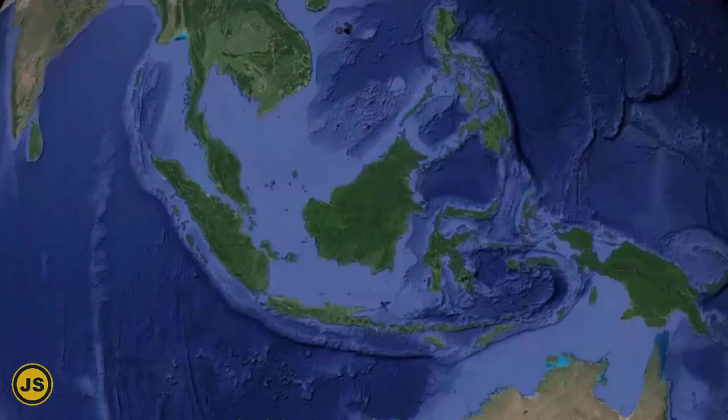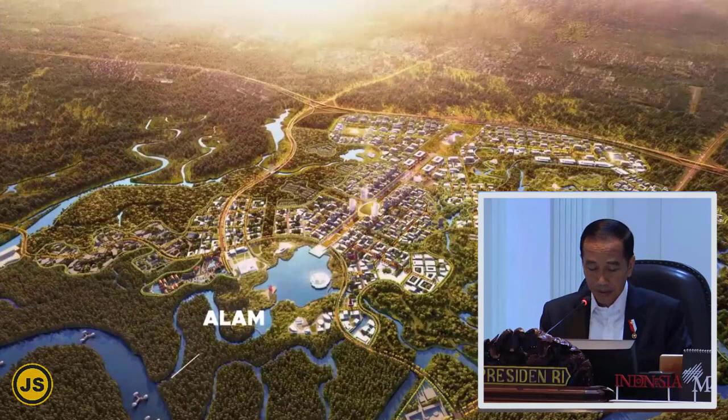Pertama saya ingin mengucapkan selamat terlebih dahulu sudah sampai pada tahapan ini, dan telah terpilih dari 755 peserta Sayembara. Itu merupakan sebuah pencapaian yang sangat hebat, dan sekarang dalam proses penilaian akhir, salah satu dari Bapak Ibu semuanya akan menjadi pemenang.

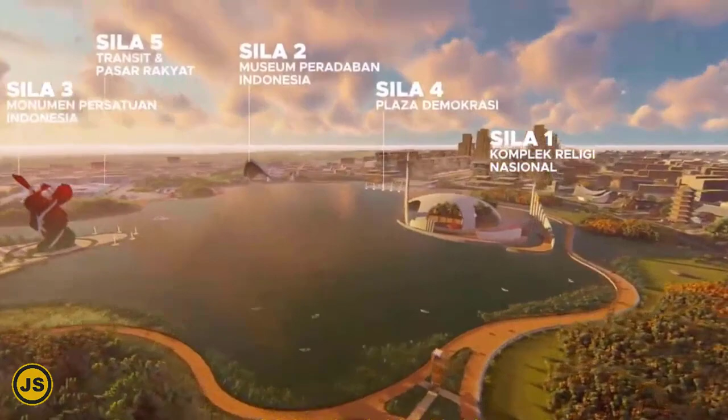Kami membawakan konsep Nagara Rimba Nusa. Jadi konsep perkotaan yang diinspirasi dari kekayaan alam dan Nusantara kita, yaitu hutan dan juga kepulauan. Pemenang terbaik pertama adalah Nagara Rimba Nusa.

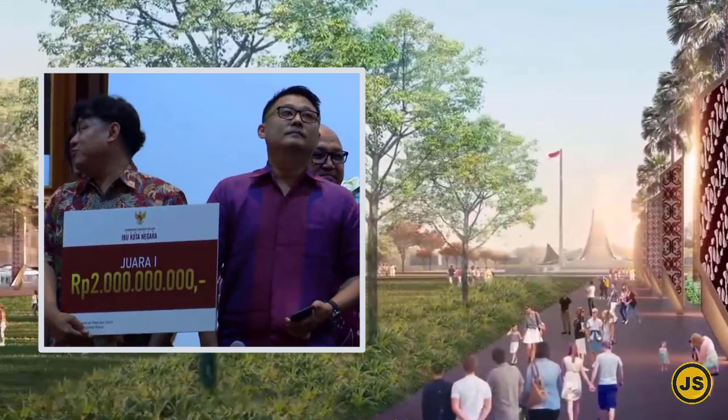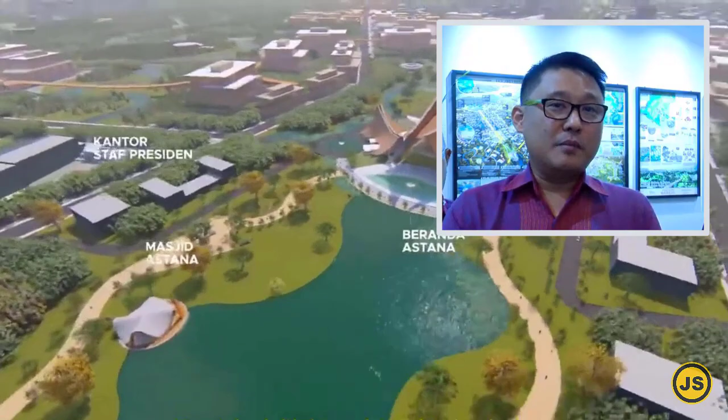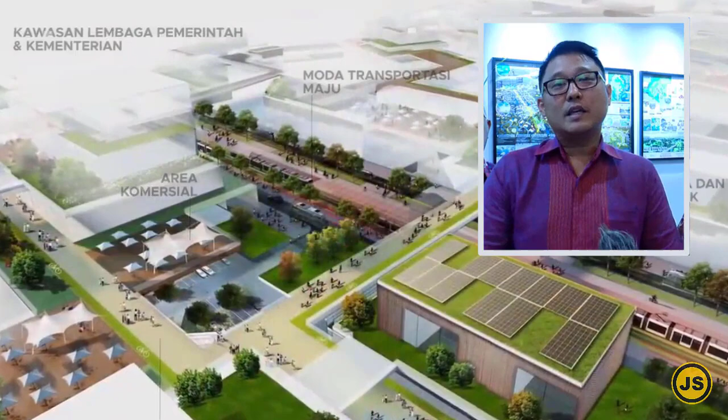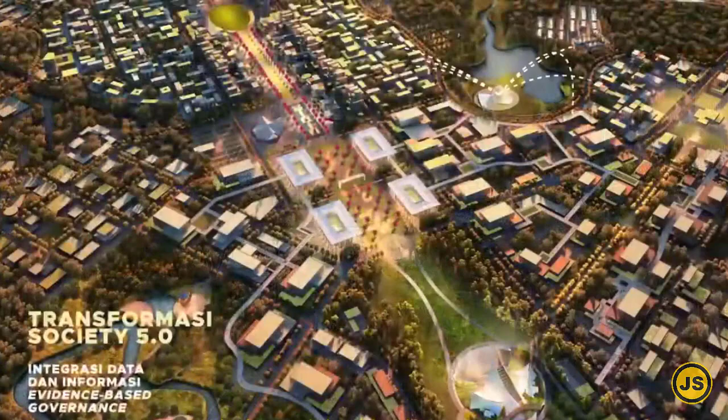Kami memilih konsep Nagara Rimba Nusa karena kami melihat negara sebagai perwakilan pemerintah dan juga rakyat ada di situ. Rimba adalah karakter hutan yang memang ada di lokasi kita di Kalimantan, dan Nusa adalah suatu hal yang identitasnya selalu bisa kita miliki sebagai bangsa Indonesia karena kita tinggal di kepulauan, dan kepulauan itu adalah identitas bangsa kita salah satunya. Dan yang kami usungkan di sini adalah bagaimana kami bisa menjadi kebanggaan untuk bangsa dan juga untuk internasional.

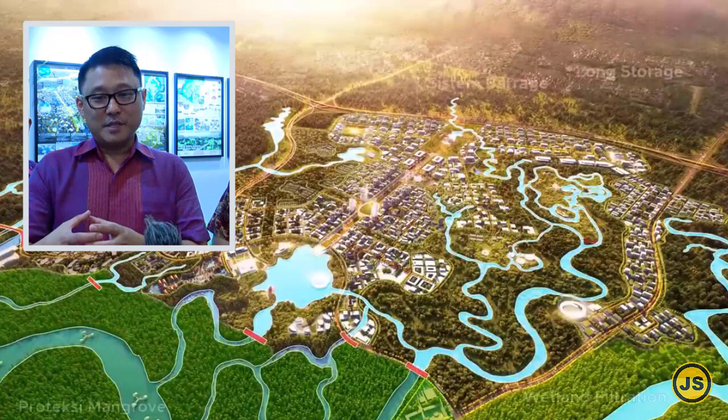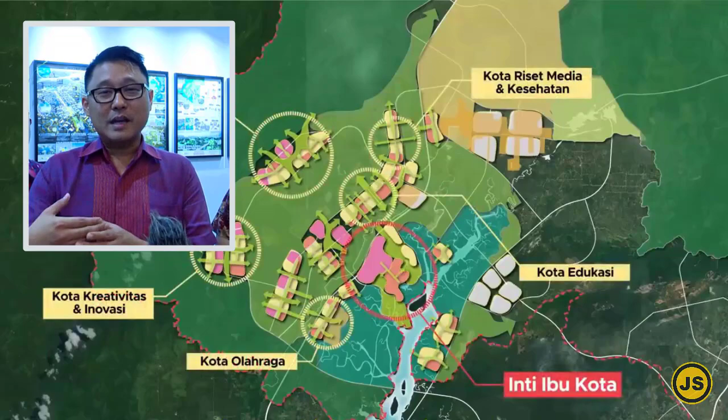Salah satunya adalah bagaimana kita mengangkat cerita hutan menjadi inspirasi kita di dalam membangun. Bagaimana kita belajar kota ini menjadi bagian dari ekosistem alam yang terintegrasi. Dan itu juga menjadi satu langkah awal kita untuk bisa membesarkan lagi hutan-hutan di Kalimantan.

Sebagai komitmen kita, salah satunya adalah kita membuat Heart of Borneo. Heart of Borneo itu 45% daerah Kalimantan itu harusnya hutan. Dan usaha ini dengan kita memindahkan ibu kota di lokasi tersebut, inilah titik untuk salah satu komitmen awal kita untuk bisa melakukan itu.

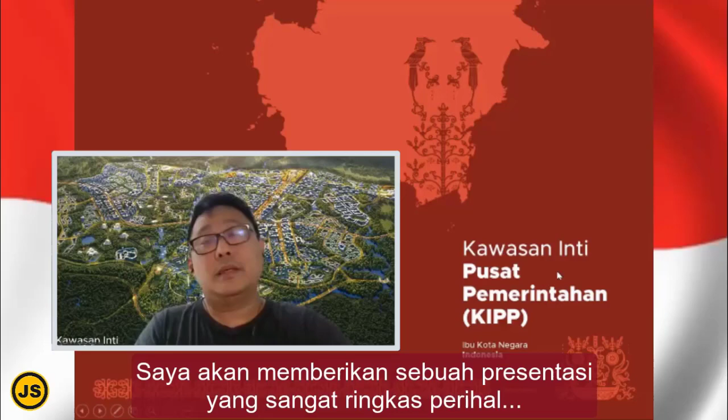I would like to give you a very short presentation about how we transform and also how we translate the vision of the president from the state speech on the 16th of August, just like what Pak Menteri, Pak Basuki already mentioned, that we have the three pillars of building a nation, and also ensuring sustainability and also smart modern city. And I would like to take all your attention to what the translation of that into what we can measure.

When Pak President gave this speech at the Sustainability Week in Abu Dhabi on the 13th of January 2020, he spelled out several key performances of the city, for example the renewable energy, the net zero, bringing also the best technology forward, low carbon city, public transportation, and pedestrian friendly. So we try to translate this into key performances.

As a winner of the capital city design, my profession as an urban designer, we try to bring this to realization into the scale and the blocks that can be discussed with everyone in the forum, especially in the architectural world. So we would like to translate this into the wisdom and the principle of the planning, which I hope can translate to all of the audience here, because I will bring a certain level of visuals.

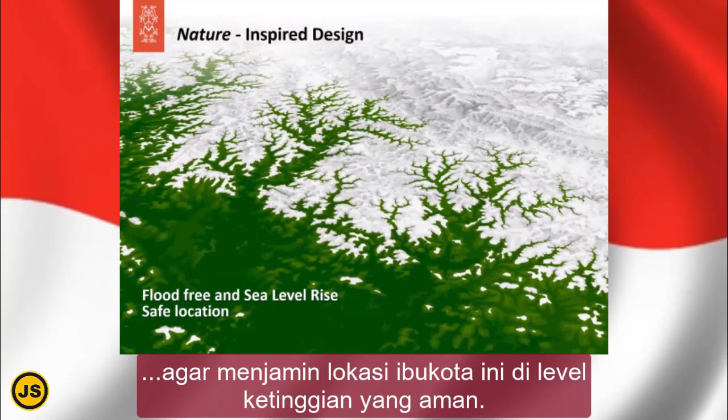And of course, we need road and accessibility frameworks, but this needs to respond to the topography of the local context. We have hill at the back, and we have also mangrove at the bottom. So we are building something in between the hill and the mangrove, the sensitive environment.

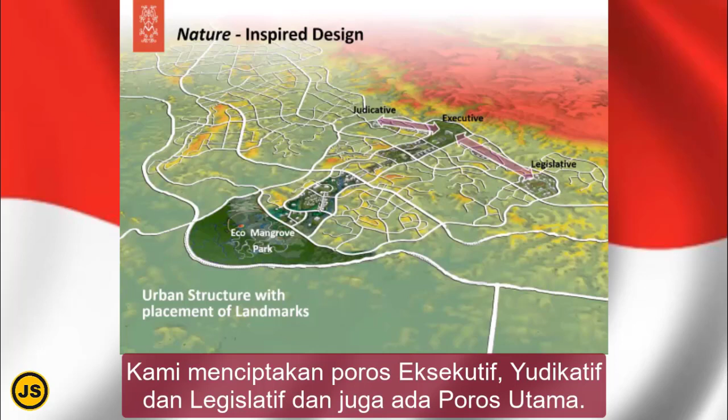So we keep all the main road system connecting between one area to another, but then we also keep the local area connected. And we try to also bring in the urban structures and the placement of the landmarks to create a certain level of axis. We create the axis of the executive, judicative, and legislative, and also the axis towards nature.

And with this, we create also a certain level of urban and green corridor. The urban area and the green corridor sit side by side to create the connectivity between the hill and the wetlands, creating this ecology, water, and animal corridor in the bigger scale.

And we also create what we call the green and blue fingers. This is essential because this will be forming 70% of our development to be green and to be part of the nature that is naturally entangling the urban area.

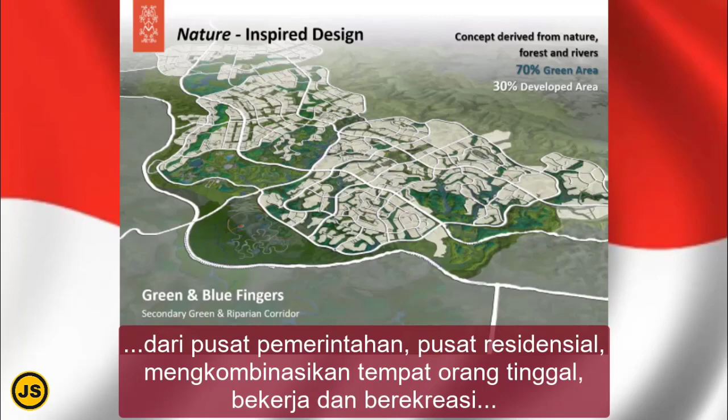So this is where we want to combine the nature and the man-made together. And the man-made area is only 30%, so we have a limited area which we need to celebrate. We need to make sure that it works as a live and dynamic city, combining the government center, combining the residential center, combining where the people will live, work, and play, where the public facility is, within what we call a transit-oriented polycentric city.

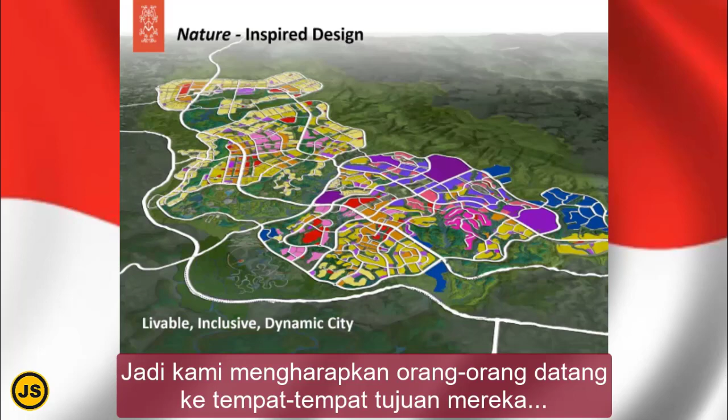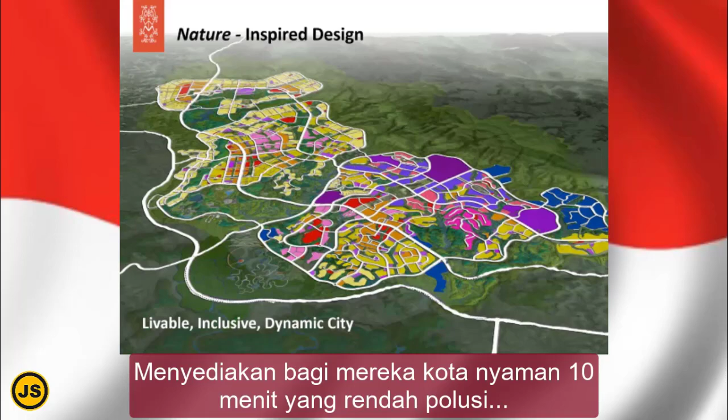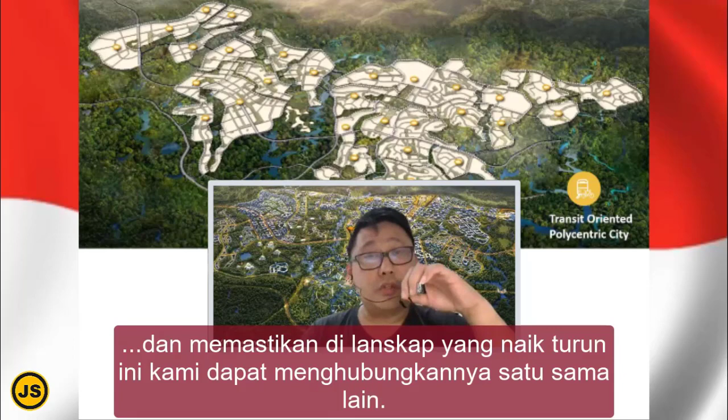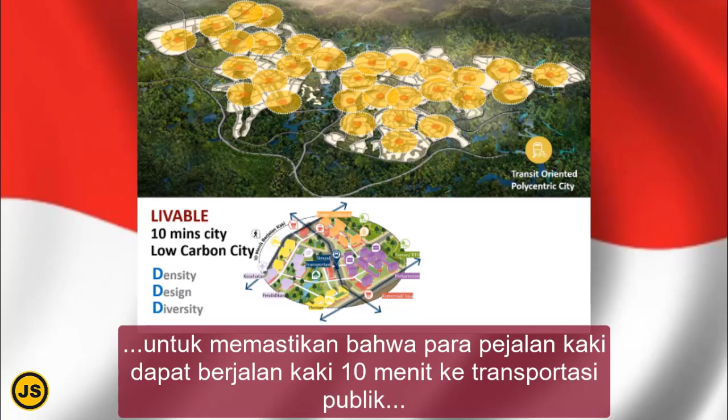We would like to bring people to the places with public transportation as much as possible, creating a livable 10-minute city, a low-carbon city with a good balance between density and design and diversity, prioritizing pedestrians instead of cars, and making sure that within this undulating landscape we can connect everything together. This is where we push the boundary to create a model to ensure the pedestrian can walk 10 minutes to public transport and also to the blocks of buildings.

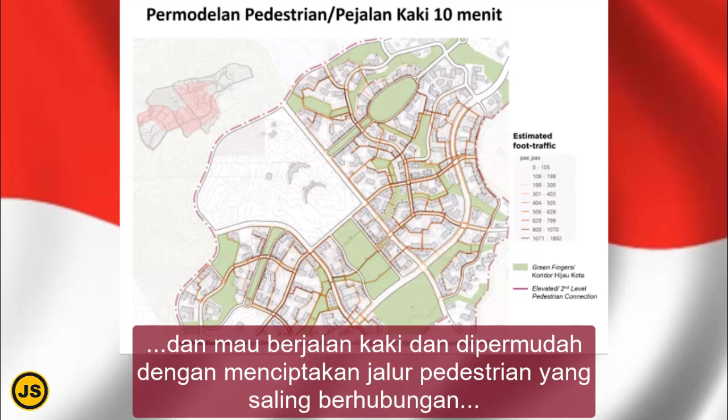This is all the ministry surrounding the palace. You can see that the red line is a model we worked on together with an MIT professor, making sure that people can reach this area within 10 minutes, and the willingness to walk can be enhanced by creating a pedestrian-level connection on the second level to make sure they can connect well.

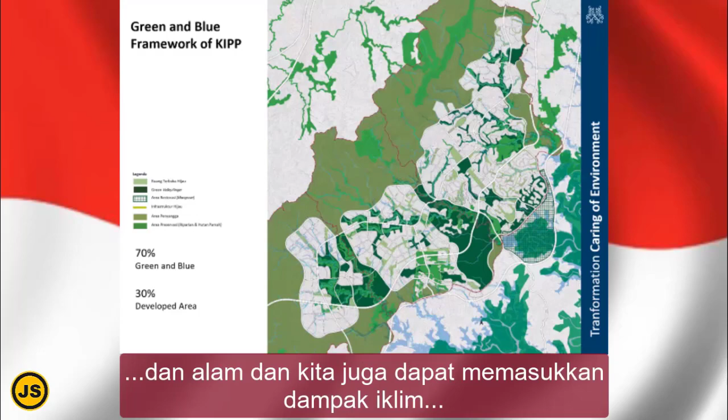If you look at the green and blue framework of the KIPP, we have this very nice entanglement between the urban area and the green area. This is part of the transformation of the caring of environment, making sure we are always surrounded by green and nature, and we can bring in climate impact benefits to the built environment.

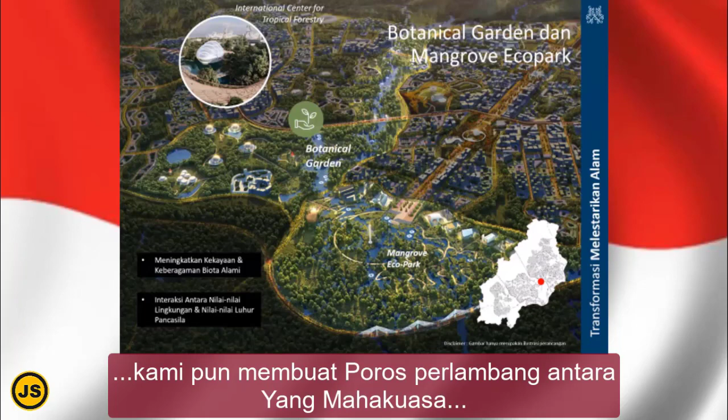We also try to celebrate the diversity of Indonesian nature by creating a botanical garden, a collection of Nusantara greenery in the middle of the capital city. We also bring in natural elements like botanical gardens and mangroves to create a tropical center of forestry. And as a transformation of nationalism and culture, we also bring in this axis between the higher being, the man, and the nature.

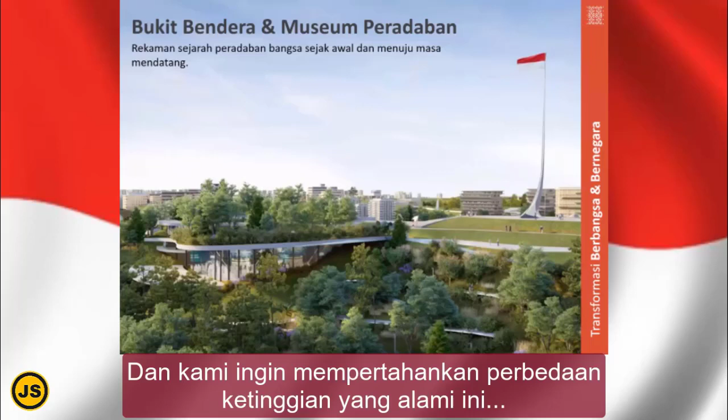We laid out all the story and celebration of our culture and diversity in Indonesia along this corridor, with the istana or palace as the ending. We designed the area below to make sure we can look into the undulating nature of the site, which we don't touch, and we want to celebrate this difference of layers of nature, the different character of the nature of Nusantara, in our design.

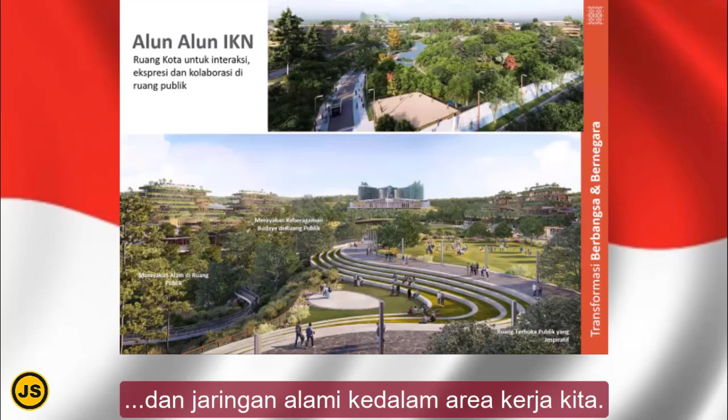With that, we create a very unique experience of public spaces which characterize the Indonesian landscape of hills and valleys and greenery. Yet there is also a block system of urban design where we want to bring the relationship of building and nature into a very different condition than the typical Indonesian or modern building - we would like to bring in a lot of forestry, greenery, and nature networks into our working area.

The government complex is consolidated and integrated with nature - we try to promote natural materials like timber, green roofs, and urban greenery into the buildings. We also try to transform the way we work by creating a building that is hybrid, indoor and outdoor. Not everybody has to work indoors - blended with nature, multi-layered program, seamless workplace, integrated zones, and future-ready workplace.

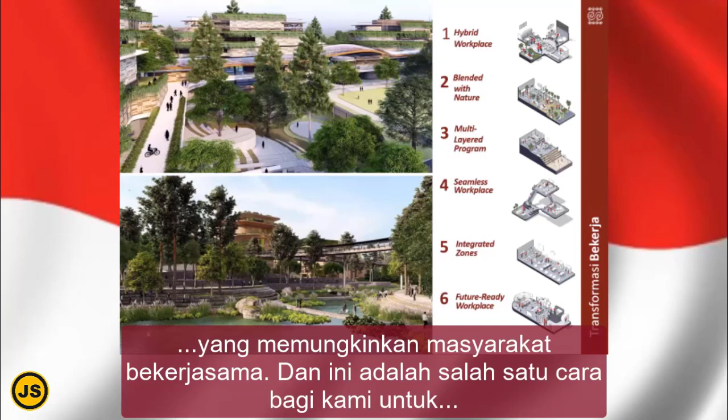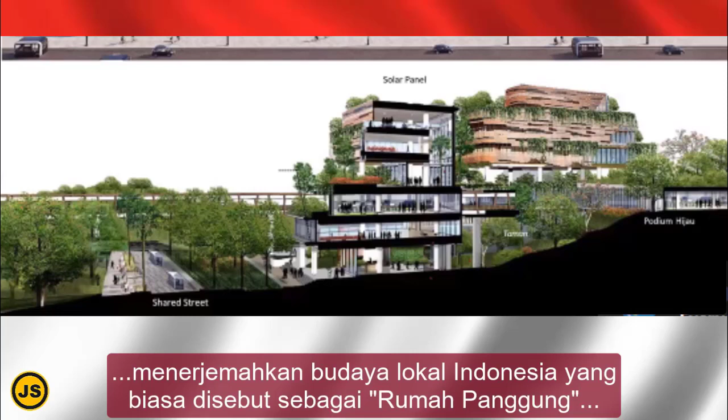With that, we hope we can bring in a certain level of compactness to the city, allowing people to collaborate. This is one way we try to translate the local wisdom of the Indonesian - we call it a piloti building, or rumah panggung. We lift up certain levels of the building in certain locations where we can allow the nature, the wind, and the water to flow freely at the ground level.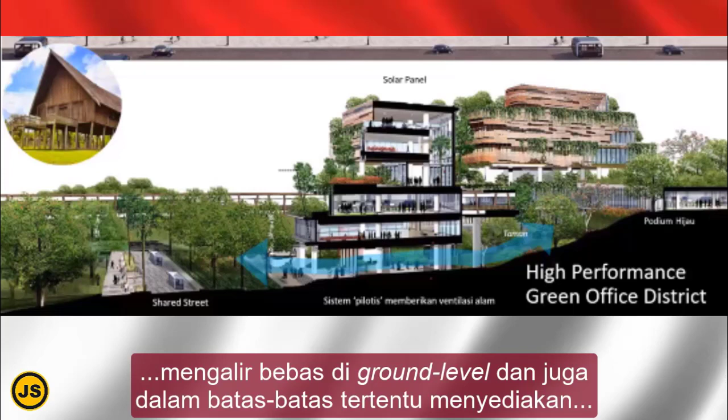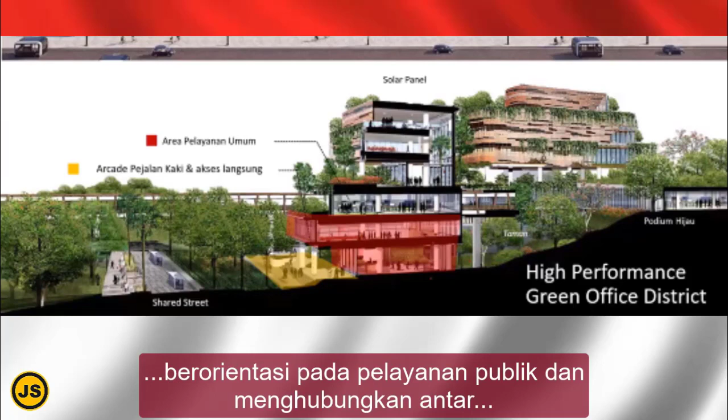And also bringing a certain level of public transport and access to the ground level, allowing the government center to be public-service oriented, and connecting between the ministries with the skywalk system that connects all the ministries into what we call the semi-public service of the capital government center, collaborating between the ministries and enhancing collaboration between them.

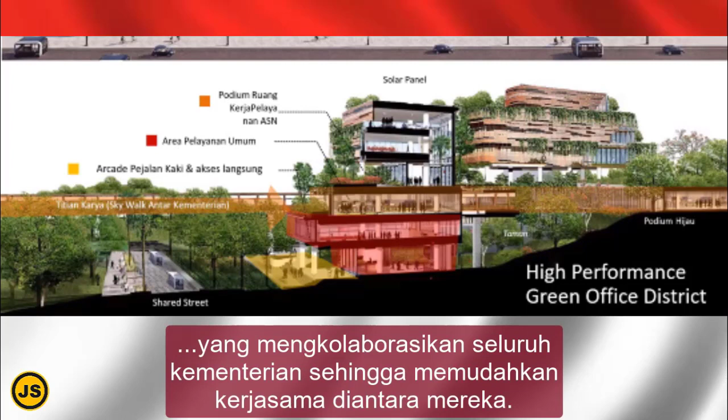So this is some of the schematics or thinking on how we can change the block of the architecture of the building, which can also transform the way people work and live and play.

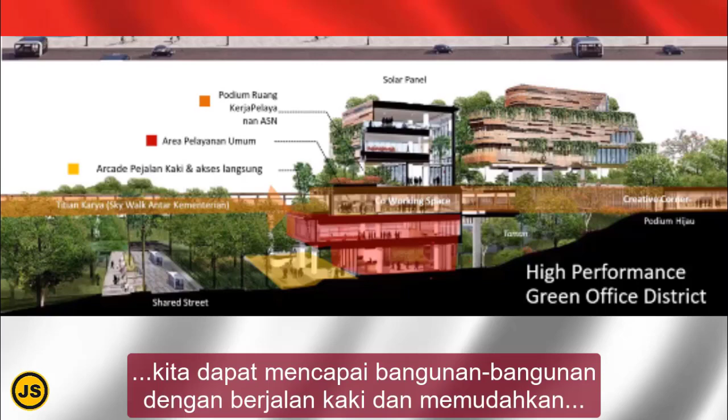We also try to promote green mobility, making sure we can reach buildings via a continuous walk that can encourage people to walk further and use public transport and bicycles instead of private cars, reducing the carbon impact. We also try to make sure it's integrated with smart infrastructure and future-ready infrastructure like autonomous cars, etc.

So with that, I hope I can deliver some of the thinking and ideas of the capital city. Thank you very much.